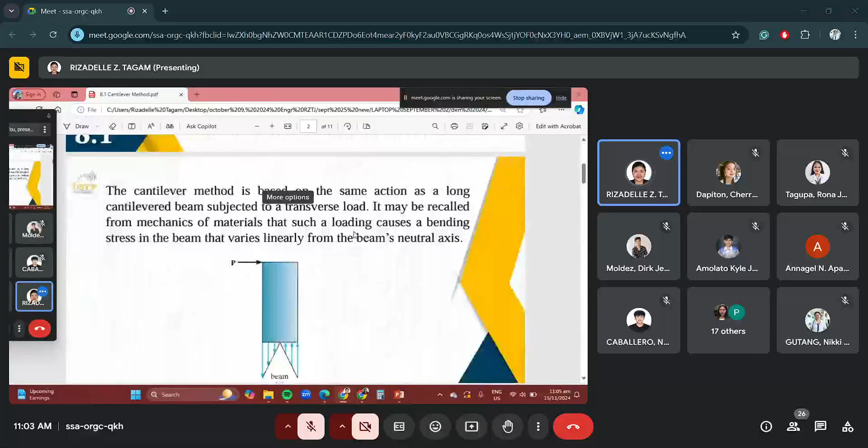So the cantilever method is based on the same action as a long cantilevered beam subjected to transverse load. So its behavior is the same as a cantilevered beam.

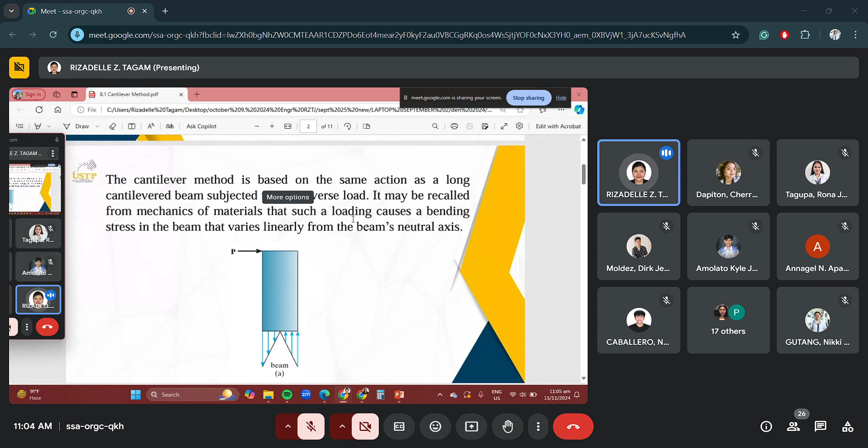Let's insert this concept, using the concept of the cantilever beam into our building frame. It may be recalled from mechanics of materials that such a loading causes a bending stress in the beam that varies linearly from the beam's neutral axis.

And if your force is applied here, there will be bending stress which happens. Usually that causes deflection. But on the profile of your beam, the curvature continues, it's curved throughout the beam.

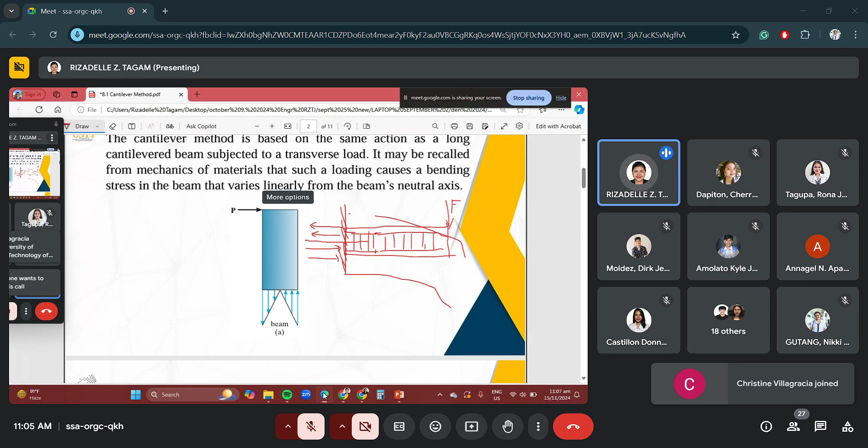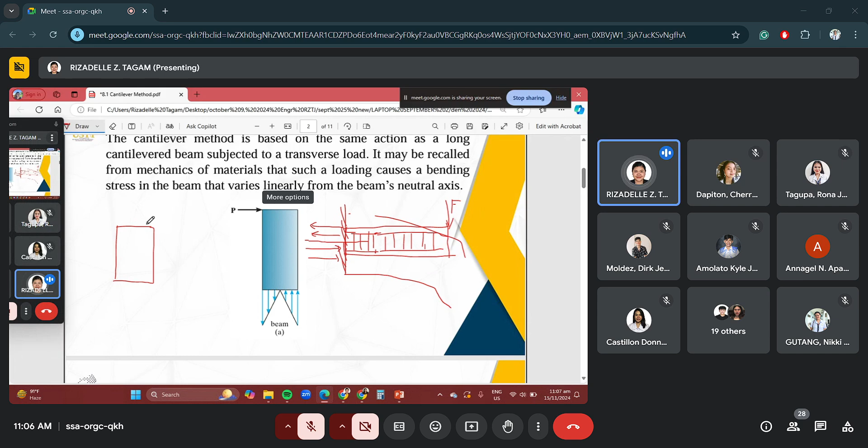The reactions counteract that. Okay, if you go on theory, in reinforced concrete, if tension is on top, compression is on the bottom, this is similar to the behavior we apply for our cantilever beam.

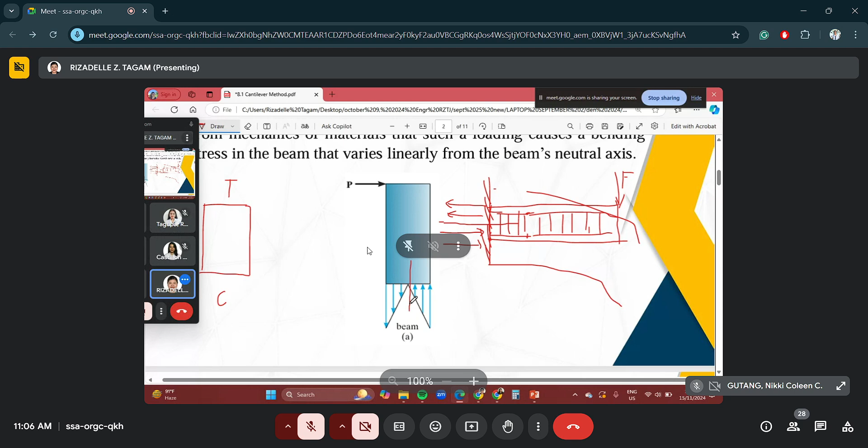At the neutral axis, on the left is tension, on the right is compression. So that concept will also be applied on our frame structure. This is called the cantilever method.

So in a similar manner, the lateral loads on a frame tend to tip the frame over. These lateral loads can cause the structure to rotate or tip, or it can cause rotation of the frame about the neutral axis.

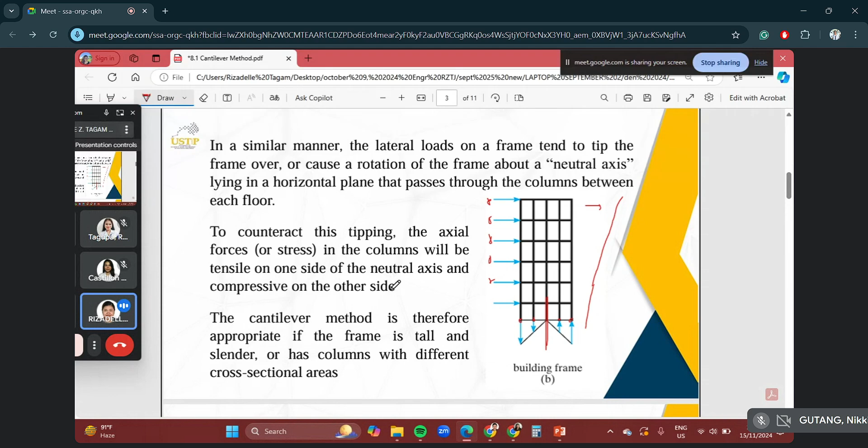So usually it's like that, and this rotation, this movement usually passes through the columns because your columns are the ones that resist it. To counteract the tipping, the axial forces in the column will be tensile on one side of the neutral axis and compressive on the other side.

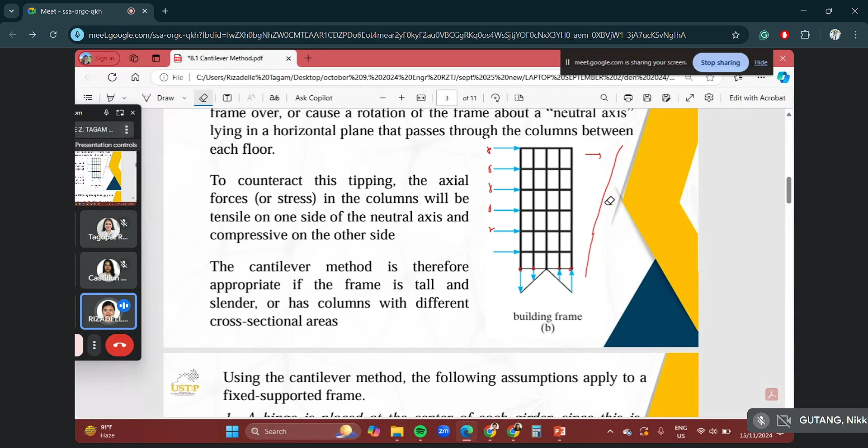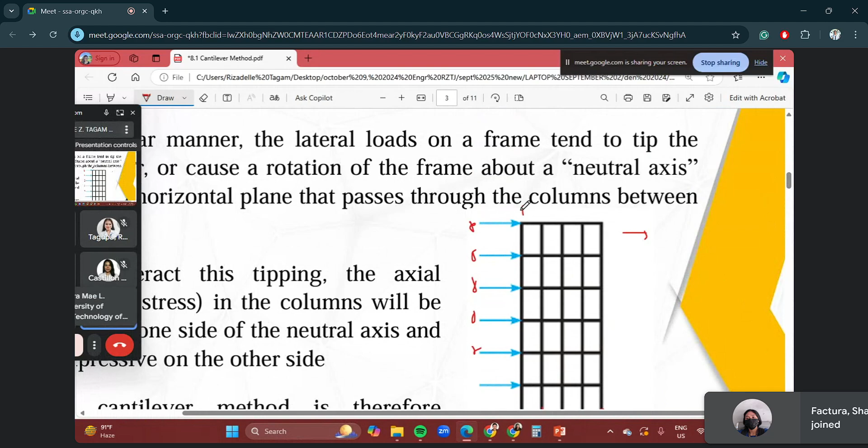This is where we also apply the concept for the cantilever. In the frame, you identify where the neutral axis is. Class, the neutral axis is not the center of the girder, don't just divide it as L. The neutral axis is L over 2, but it's not always like that, you need to solve for the neutral axis.

And once you've solved for the neutral axis, on one side, which is the left, that will be tension. On the right side, that will be compression.

The cantilever method is therefore appropriate if the frame is tall and slender, and the columns have different cross-sectional areas. In the portal method, we don't consider the cross-sectional areas, we assume they are the same. But if they are not the same, we apply the cantilever method instead.

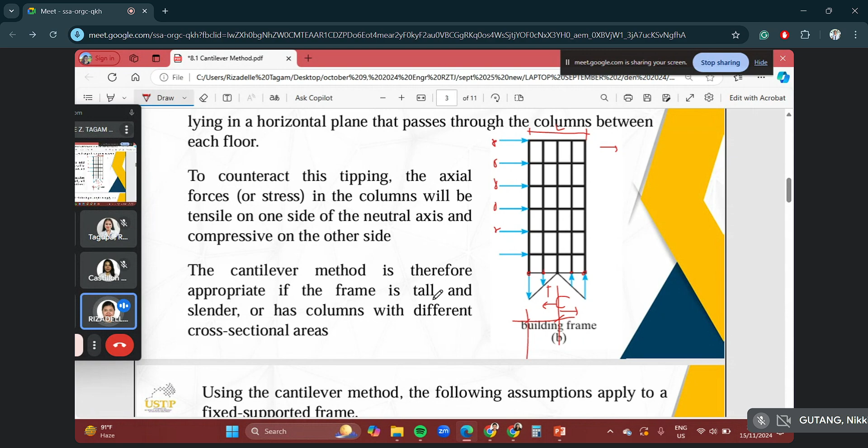So in the cantilever method class, we also have three assumptions to be applied, but these assumptions will be applied on a fixed supported frame. Fixed supported, okay.

In the portal method, we have three assumptions. In the cantilever method, we also have three assumptions. The first two are the same for portal and cantilever. The first is to place a hinge at the center of the girder, and that point has zero moment. The second assumption is to place a hinge at the center of the column, and that point is assumed to have zero moment.

But our third assumption is different. It's about the axial stress in a column. Now take note class, in the portal method, the third assumption is about the shear stress in a column. Shear is horizontal, right? In cantilever, the assumption is axial stress, meaning vertical. We only assume a vertical value. Okay, so that's the difference.

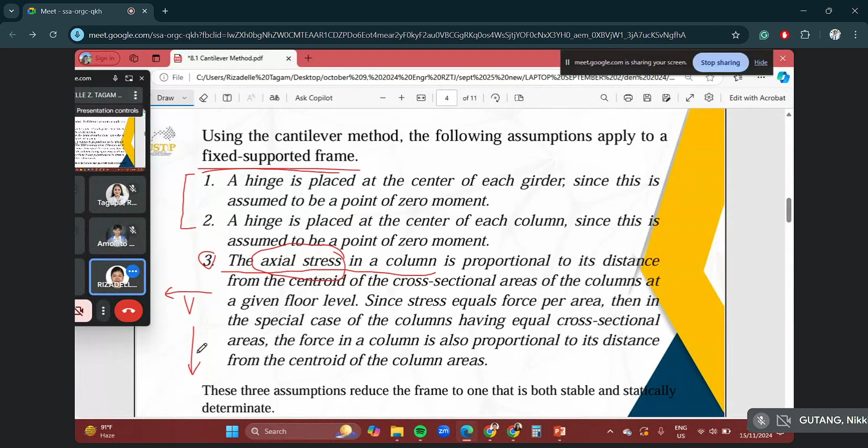So the axial stress in a column is proportional to its distance from the centroid of the cross-sectional area. So the cross-sectional area matters for our cantilever method, and you should know the distance from the centroid, that is, the cross-sectional areas of the column at each given floor level. So the analysis is by floor level.

So, since stress equals force over area, then in the special case if the columns have an equal cross-sectional area, the force in a column is also proportional to its distance from the centroid of the column.

If in this assumption the cross-sectional areas are the same, we can use force as proportional to the distance. But if they have different cross-sectional areas, you need to use the value of the cross-sectional area to find the centroid and solve for the axial stress.

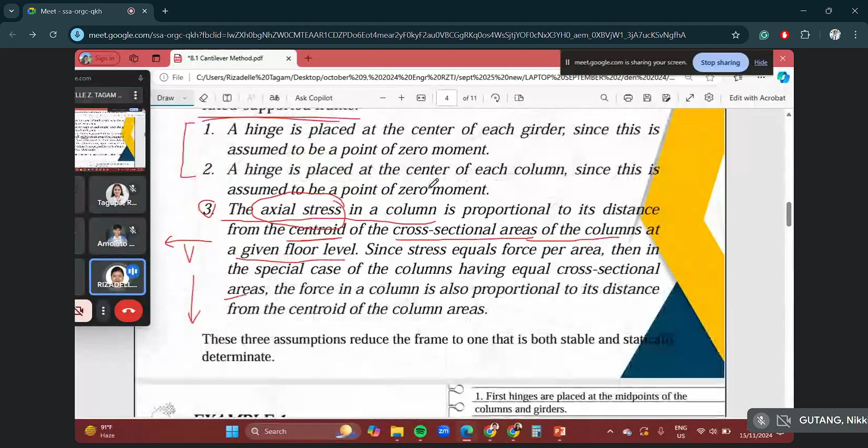So these three assumptions reduce the frame to one that is both stable and statically determinate. So that's the three assumptions, the first and second are the same as before. Now let's look at number 3.

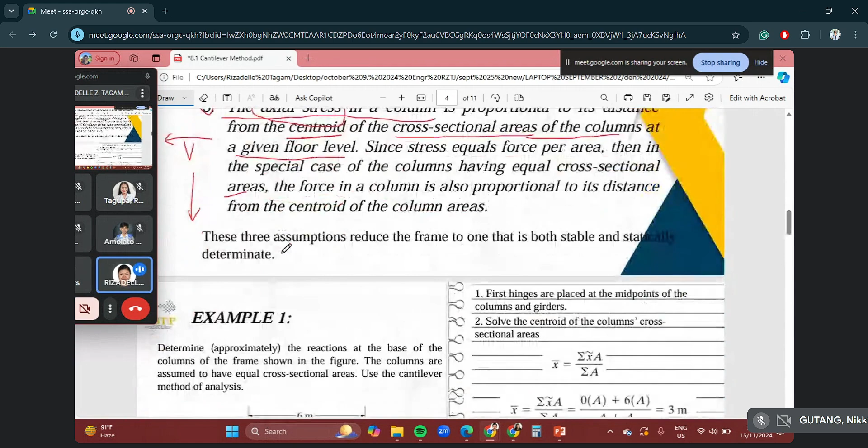So let's go to the example, class, still about frames. Determine approximately the reactions at the base of the column of the frame shown in the figure. So we need to get the reactions. For a while, let's start first.

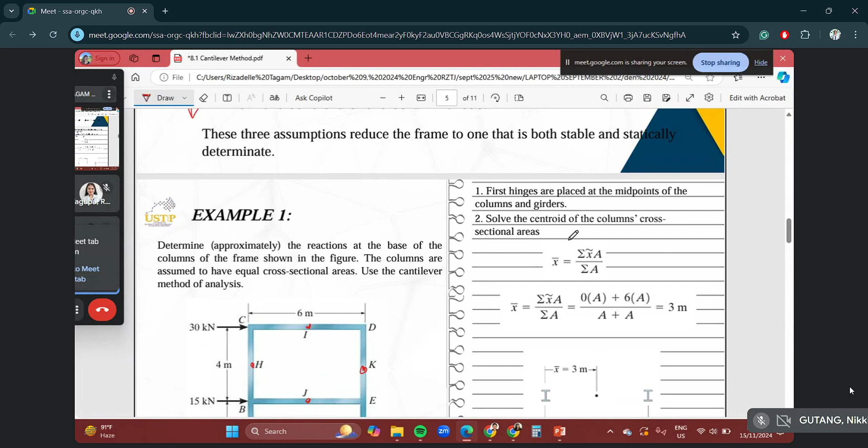First assumption: place hinges at each girder and beam. Second assumption: place hinges at the columns. So hinges are placed at midpoints of the columns and girders. The second assumption is to solve for the centroid of the column's cross-sectional area.

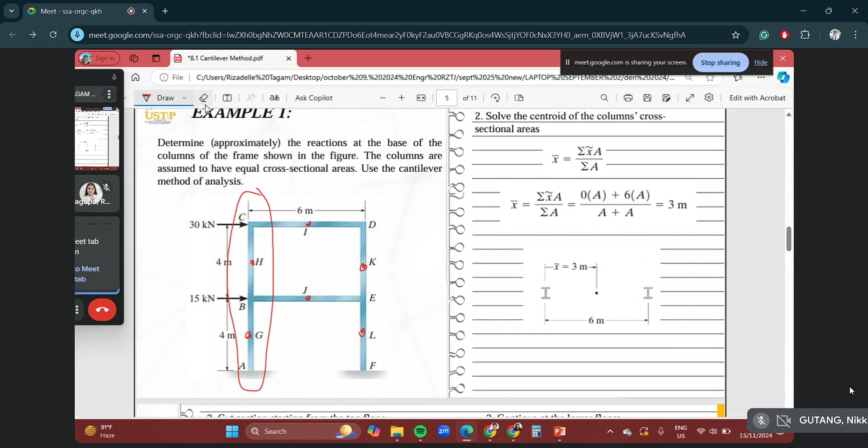For solving the cross-sectional area, since this is a typical frame, for each column going down to the ground, we assume the same cross-sectional area. But if ever they are separate and not the same cross-sectional area, from top to bottom it should still be the same, not different from top to bottom.

So as a whole, our analysis is for the centroid. The equation is this: X bar is equal to the summation of x multiplied by a, over the summation of a. This x is the distance from the left side multiplied by the cross-sectional area, over the summation of the cross-sectional area. If the cross-sectional area is the same, you will consider it as 1.

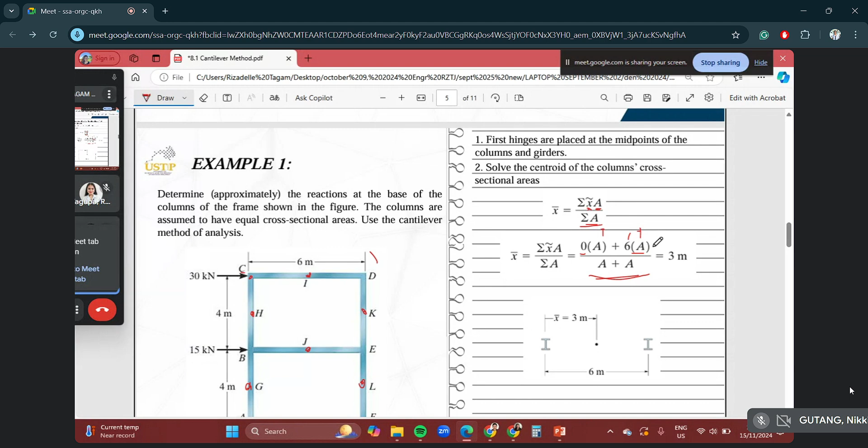The value is 1. So here, first is column C, this location, so 0, because we don't start at a point to the left. Cross-sectional area is A, plus 1. From C to D is 6 meters, so 6 times A, since they have the same cross-sectional area, over A plus A, area plus area. So the X bar we get is 3 meters.

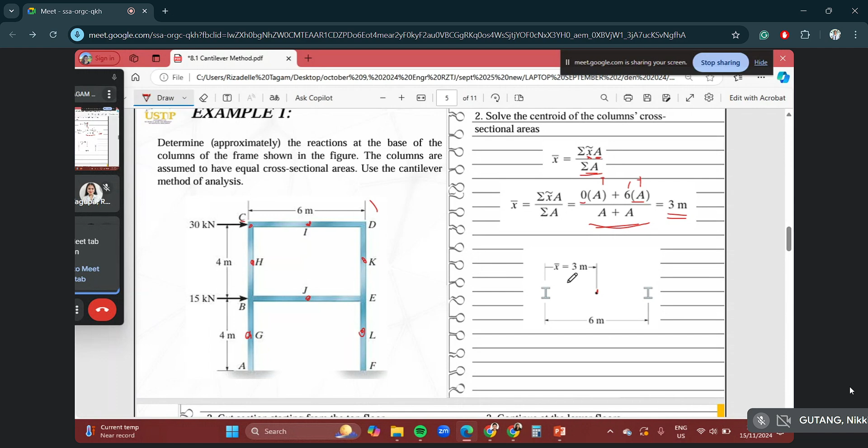Meaning your centroid is 3 meters. If you notice, if the cross-sectional areas are the same, usually the centroid comes out at the center of the girders, or at the center of your total length. But if not, with different cross-sectional areas, your centroid is not located at half the length. You have to solve for it. So now you have your X bar, which is 3 meters.

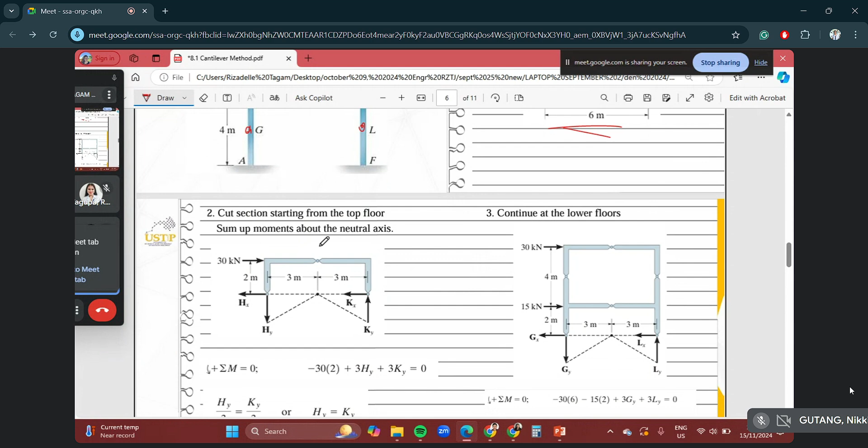The next step is you cut sections starting from the top floor and sum up moments about the neutral axis. If we compare this to the portal method: in the portal method, after placing hinges on columns and beams, you place the shear directly - 2V at the interior, 1V at the exterior, right?

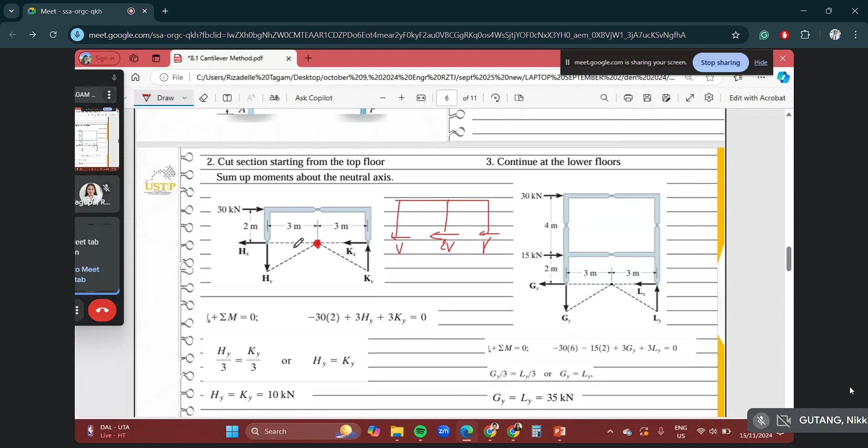When it comes to the cantilever method, you first get the neutral axis, or rather, get the centroid. After getting the neutral axis or centroid, to the left you place tension, to the right you place compression. They should be opposite - that's the concept in our cantilever method, opposite.

So if ever you have three columns in your frame, and you found out that the neutral axis is located somewhere here, so if to the X bar, this side is tension, these two are tension, this one is compression. Right? Okay, so the concept is: one side of the centroid is tension, the other side is compression. That's exactly how the cantilever method is set up, class.

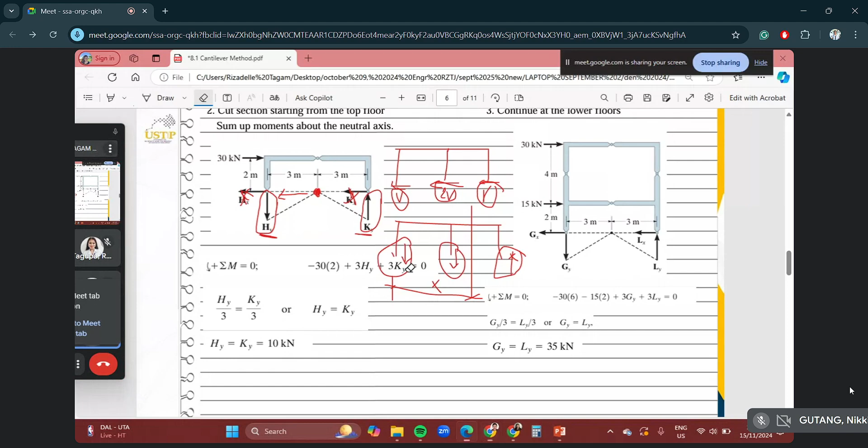In the portal method, you need to get the value of V first. In the cantilever method, you need to get the value for this one, the axial stresses. That's because these are unknown, right? They are unknown - what we solve for here is HY and KY, because that is what is stated in our assumption. That's the concept for the cantilever method.

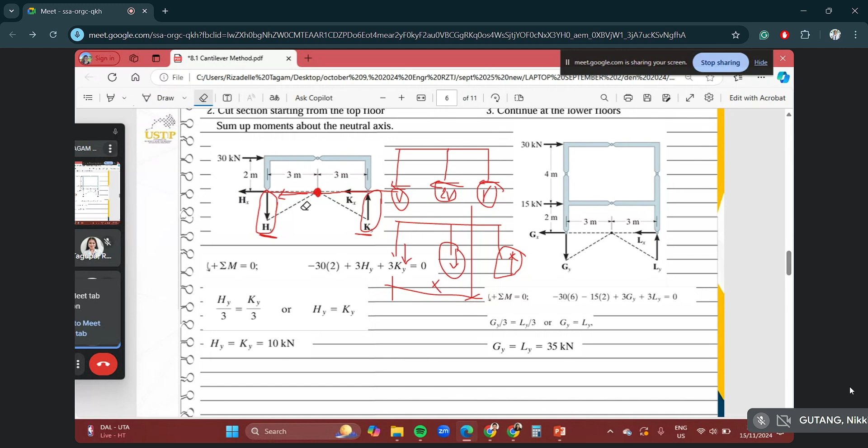To solve it, you will do summation of moment at the neutral axis, at your centroid, and at the part where, because of the hinge, HX and KX become zero. The unknowns are HY and KY.

And as you can see, these are proportional triangles, similar triangles. So you can apply the principle of similar triangles and conclude that HY equals KY. Now you can substitute: 3HY plus, you can make it HY since they are equal. You will get an answer of 10 kilonewton. So HY equals KY and the value is 10 kilonewton.

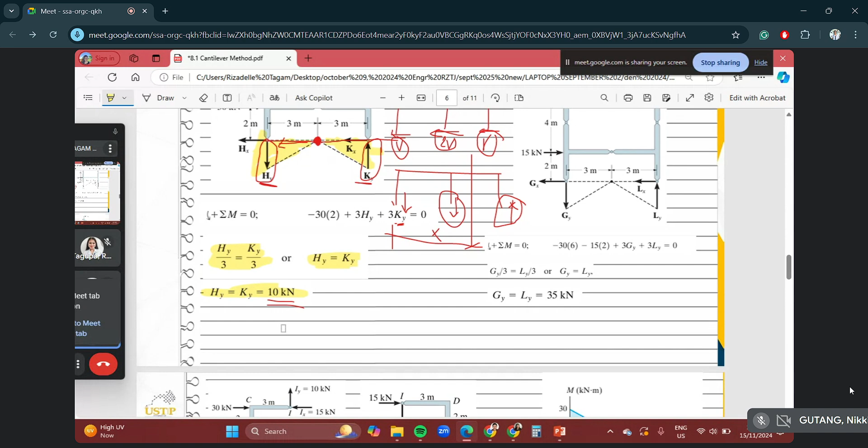So now you have the value of your axial stress on the top floor - not just the lateral force, class. Now you need to identify the values for the lower floor, since there are two floor levels. The process is the same: get the neutral axis, then tension on one side, compression on the other.

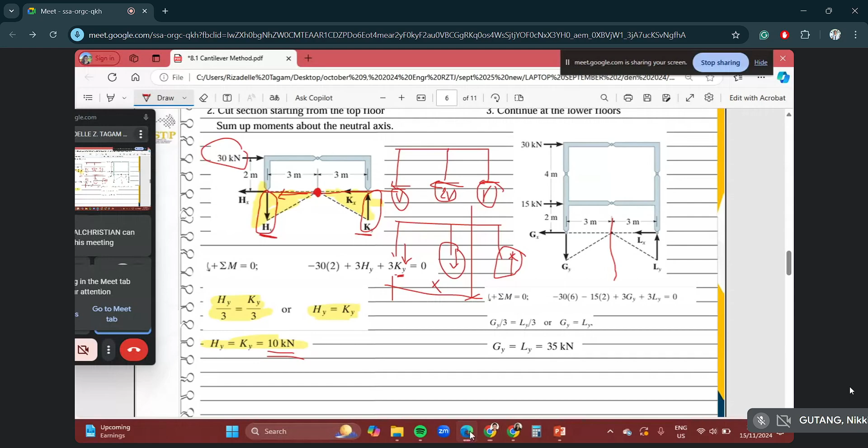Summation of moment. The forces now here, depending on your lower floor, you apil the 30 kilonewton that's on top. So the concept is the same as the portal method, kung mag-ubos ka na sa imong floor, apil na nimo ang lateral load sa taas. And then same gyapon, similar triangle sila. So GY and LY are the same.

So summation of moment, 30 and 15. Diri ka mag-summation sa center. Your GY and your LY is 35 kilonewton. Mao lang na values imong i-establish class, the value of your axial stresses.

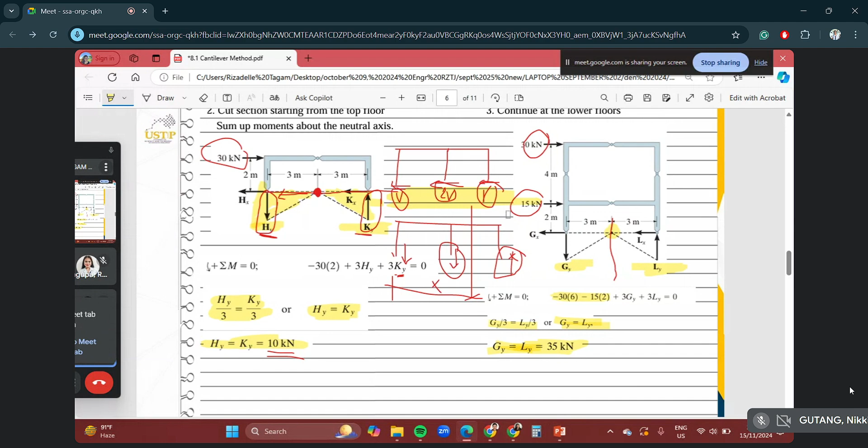Kay sa portal atong gina-establish is the value of our shear. Aya ta mo go into cutting sa atong hinges and mag-drawing tag FBD and then maglabay-labay ta og force. Sa cantilever, axial stress atong pangitaon. After makuha nimo ang axial stress into the frame on each floor level, aya na dayon ka mo go on into finding forces at each cutting.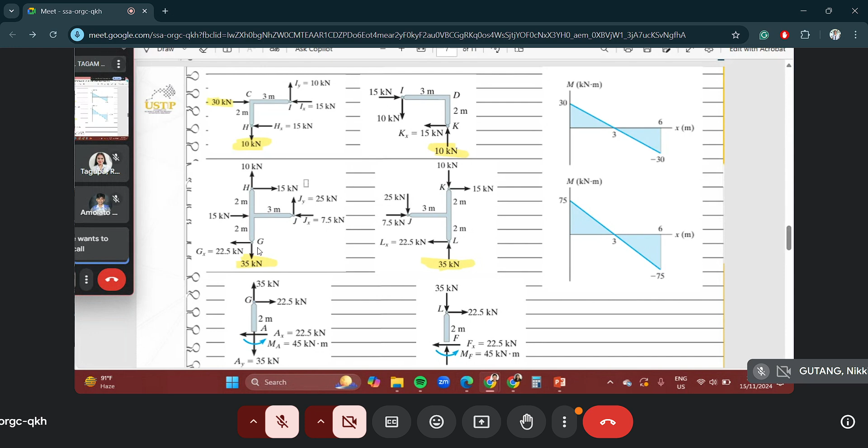So ang known ana is kaning 30 and then kaning axial. Kaya pag abot sa portal, ang known man is the lateral and the shear, kaning horizontal. Sa cantilever, si axial ang known, kani sila. And then you proceed on solving the forces using equations of equilibrium until you reach the bottom nga makakuha ka og reaction. So mao lang na ang cantilever method class.

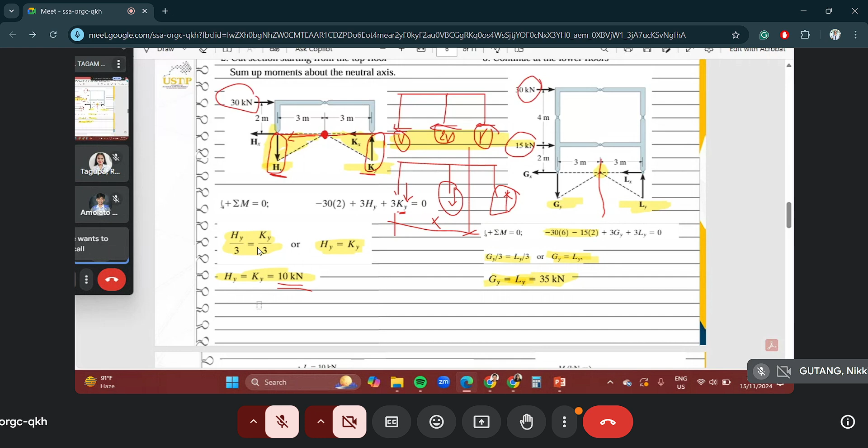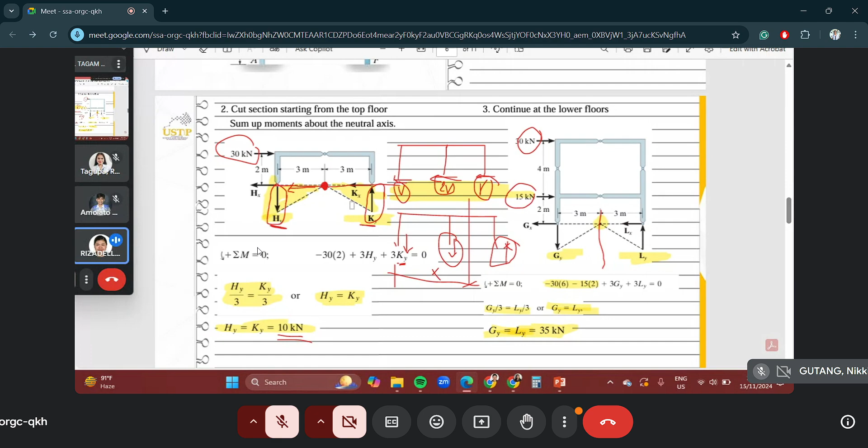Diri lang ka, diri ra ang changes, diri ra ang kalainan on finding the axial. So remember, para dili mawala, si portal, imong kuhaon is the shear, which is your horizontal force at each column. Column na gyapon. Ang cantilever is axial stress, which is the vertical force at each column also. Dayon, kuha nimo ang mga axial stresses, proceed na dayon into solving forces or hinges.

So muna din yung moment diagram, perfect. So any question? Naa tay tulo ka assumption, dali na siya ma-apply. Anyways, kaning concept, kaning topic sa cantilever and portal method is ginabalik-balik na sa inyo og discuss. Na-discuss mo gyapon ni siya, perhaps on mechanics of deformable bodies, or murag apil sa statics, wala, murag di sa mechanics deformable siguro.

Excuse me ma'am, pwede ra mag-alternative nga solution ma'am? What do you mean alternative? Kuhaon ang moment of inertia ma'am. Ang imong gamiton, kanang pwede mo yapon siya ng method for cantilever, M over I.

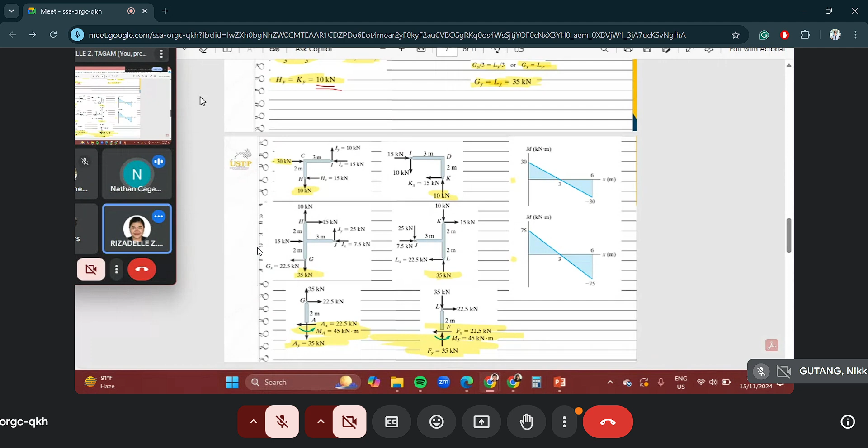Yes ma'am, pwede ra ma'am. Tanaw na to ha, tanaw na to. But they can, makahatag mangyapon na siya og same answer. Pero you can use it kung given ang moment of inertia.

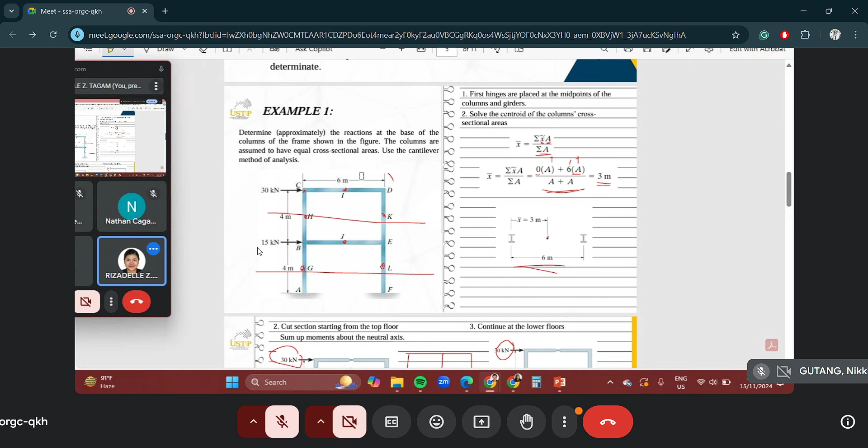Usually, diri ang given man is the cross-sectional area. Tawaning number 2.

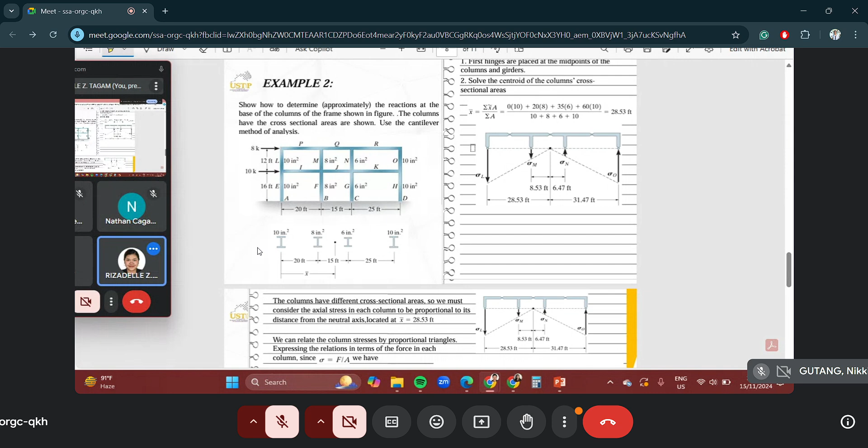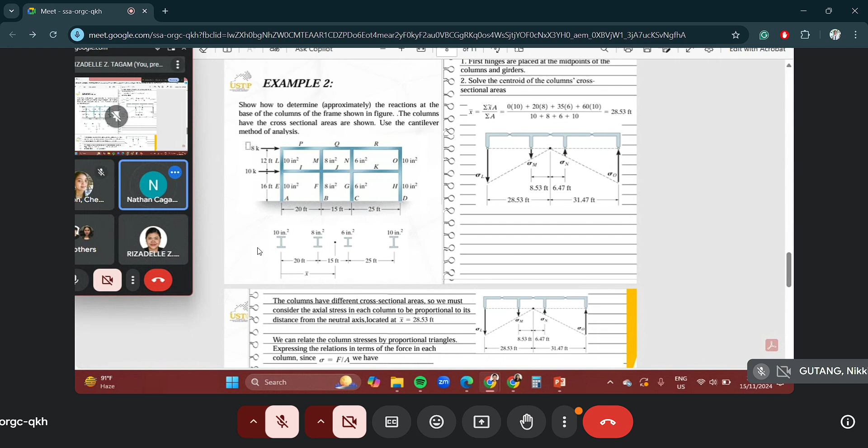Pwede ra man gihapon kay magamit mangyapon ka og centroid, 'di ba, for your moment of inertia. Yes ma'am, so unsay convenient? Oo, kung unsay convenient. Basta correct ang answer. Pero diri, whichever you find easier.

Okay, so kani example 2, tanawon. Kumanan ko lang ni. This example 2 is pangitaon gyapon ang reaction at the bottom of the frame, the columns sa frame, and they have different cross-sectional areas. Use cantilever method. So lahi sectional area, lahi po dere, lahi po here, and lahi dere. If you solve for the centroid of the cross-sectional area, different gid imong makuha na answer ana. Dili siya at the center of the structure.

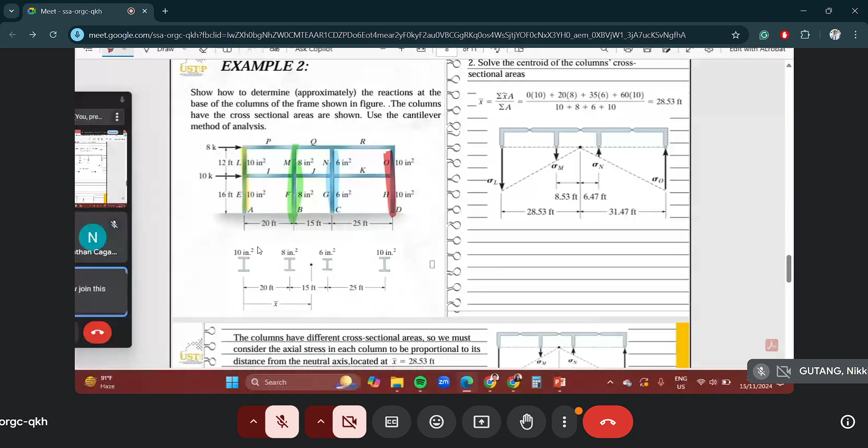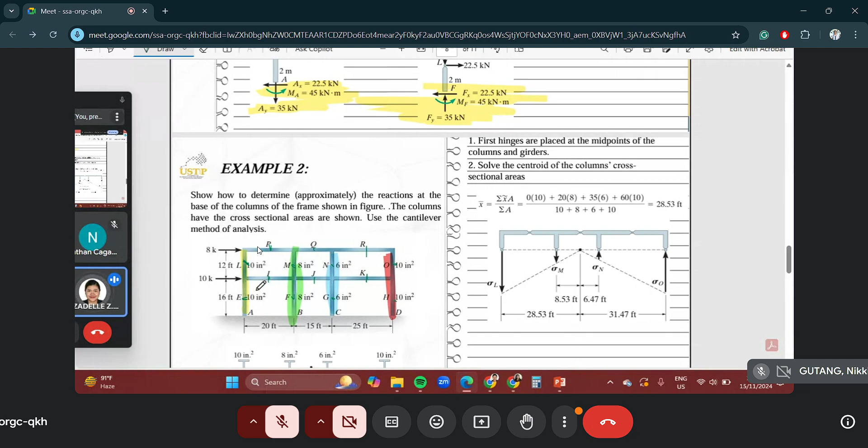So muning distance, first is you place hinges. Magyapon to place kag mga hinge at the center of the beams and columns. Center gyapon siya. So pag mukati na kasi imong hinges, kabalo ka sa distance, kay half from gyapon na siya. Then solve ka for the centroid of the column's cross-sectional areas. So this is our equation.

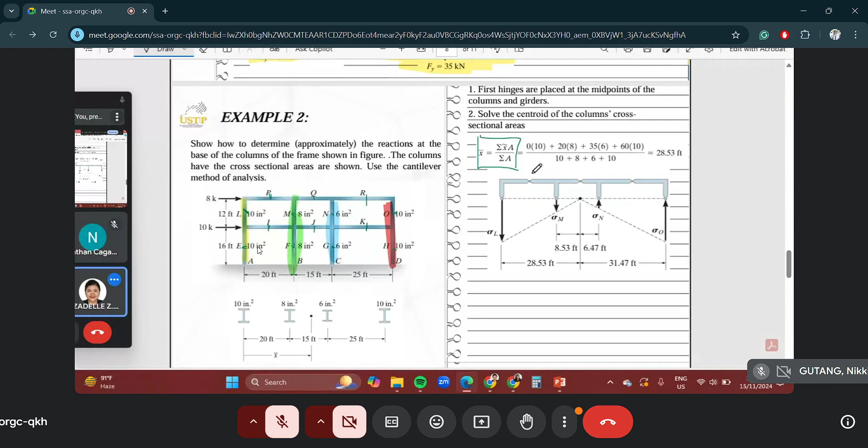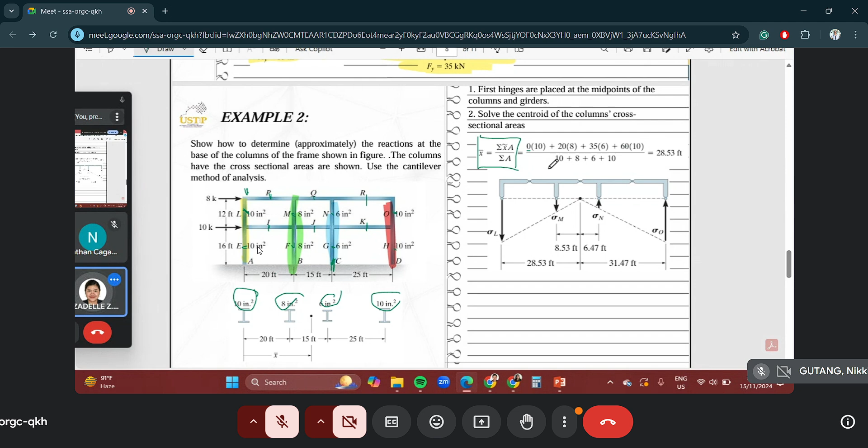So from the left, dito gikan. So 0 plus 10 nga cross-sectional plus 20 nga distance, 8 na cross-sectional area, plus distance na 35, kay diri nga column is 20 plus 15, multiplied by 6 na cross-sectional area, and then sa last is 20 plus 15 plus 25, so 60, multiplied by 10 yung cross-sectional area, over the summation of cross-sectional area. Your centroid is 28.53 feet.

So i-drawing na din mo asang centroid. On the left side, butang nimo tension ang mga axial stresses. On the right side, compression ang mga axial stresses. And then you put the distance, then you can identify the distance from the column M, neutral axis, i-minus naman nimo kay 20 feet man eh. Diba, you can eventually solve the distance.

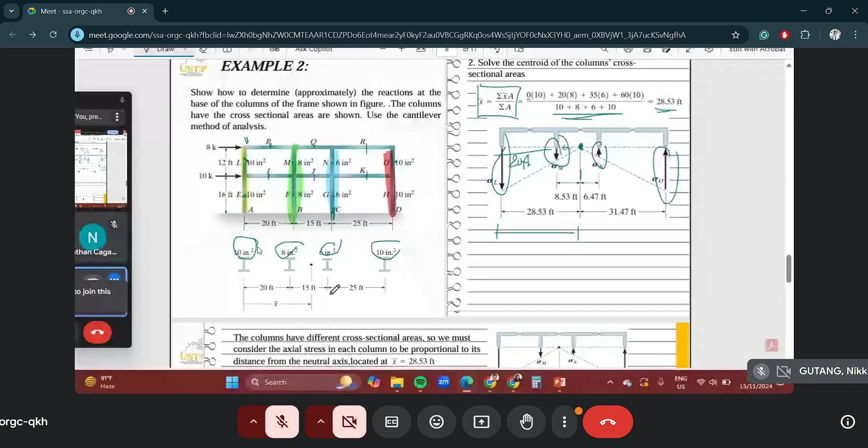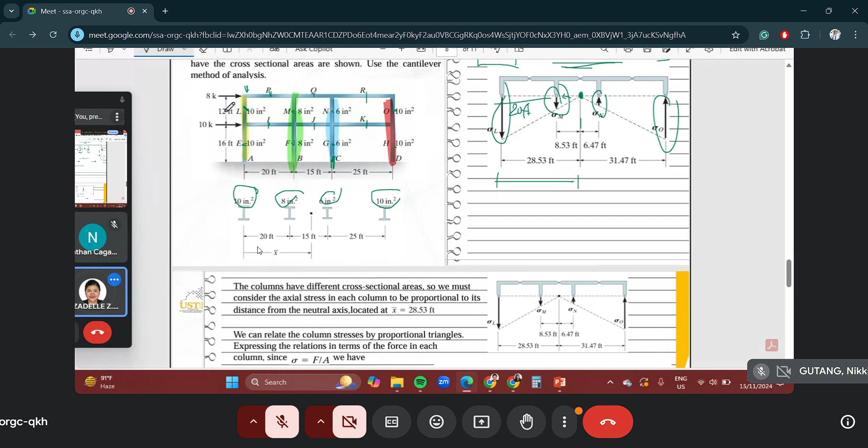Okay, so after niyo ma-solve ang centroid, kailangan nimo ma-solve ang forces: si Ly, si My, si Ny, si Oy. Dili pa lang na sa top, mo-solve po din ka sa second layer. So they are having different cross-sectional areas.

So we must consider the axial stress in each column to be proportional to its distance from the neutral axis located at 28.53. Now, ang atong pag-solve ani, because they have different cross-sectional areas, atong gamiton is ang stress. The axial stress of the column is proportional to the neutral axis.

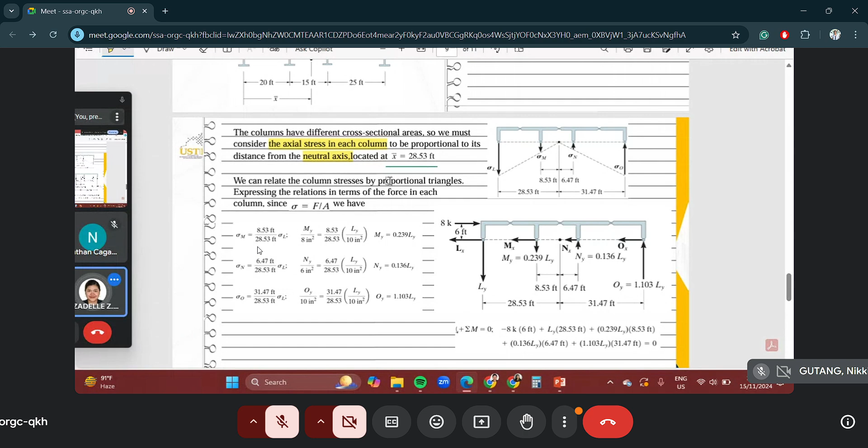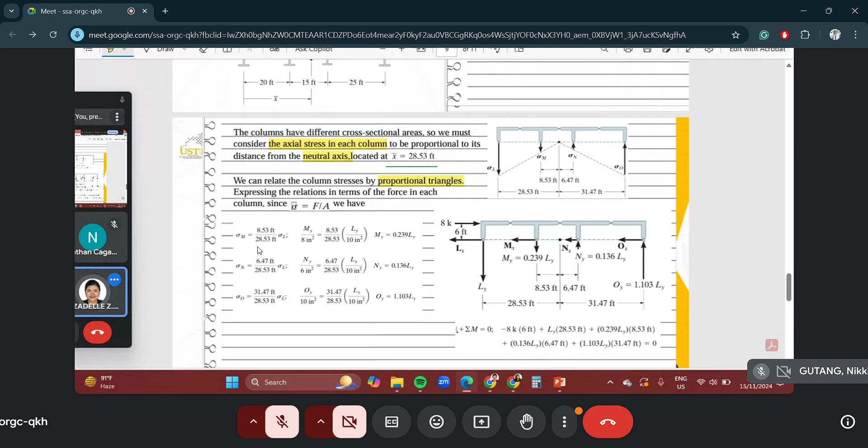We can relate the column stresses, since if you look at them, they are proportional triangles. So we can put relationship into the forces of the column since stress is force over area. This is a triangle, one triangle, one triangle, and one triangle - four proportional triangles. Because they are four unknowns, we cannot easily solve this.

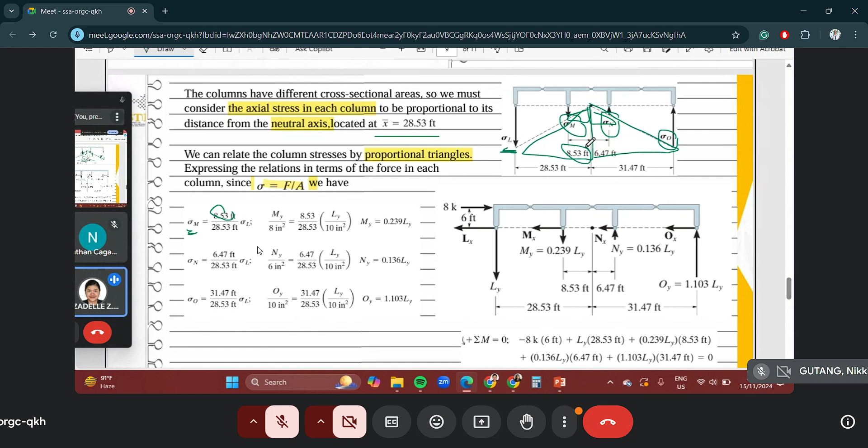So we will get the equation of my in terms of ly, ny in terms of ly, and oy in terms of ly. So it's proportional - the stress is proportional to the distance of each column to the neutral axis and to the stress of our L. So for this one, 8.53 over 28.53, which is the distance of L from the neutral axis, multiplied by the stress L.

So for your N, stress N is 6.47. This is proportional to L, since L is our basis. It should be obtained in terms of L - 28.53 multiplied by the stress L. For OY, for O, stress O is 31.47, its length multiplied by the stress L.

Now let's simplify - stress is force over area. So my over the cross-sectional area of 8. This is the distance, and for ly it's ly over cross-sectional area of 10. Where did the 10 come from? For ny, its cross-sectional area is 6.

You put the distance as proportion, and ly over 10 inches squared - force over area. The same goes for oy. And when you simplify the equation, my is 0.239 ly, ny is 0.136 ly, so oy is 1.10 ly.

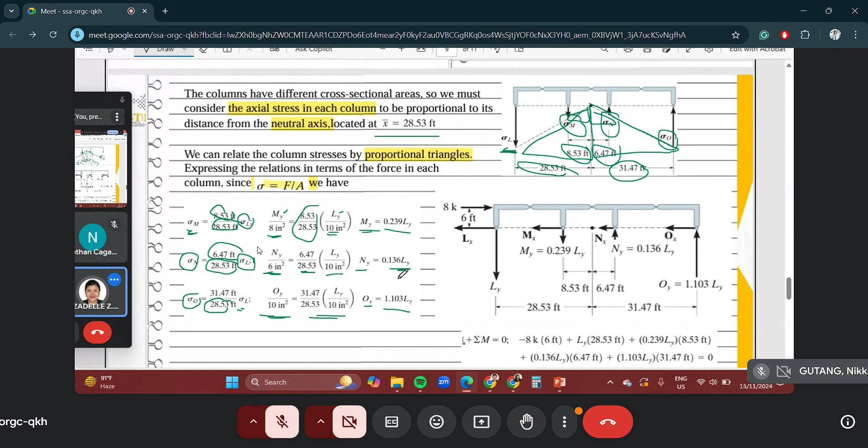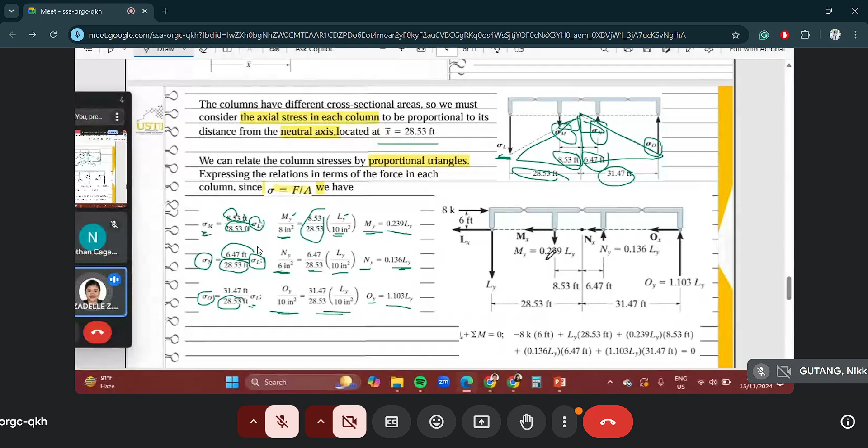So now you have the equation of the forces my and ny in terms of ly. That's why you substitute here into your actual stress equations, and you can now do summation of moment at the neutral axis at the distance of the centroid.

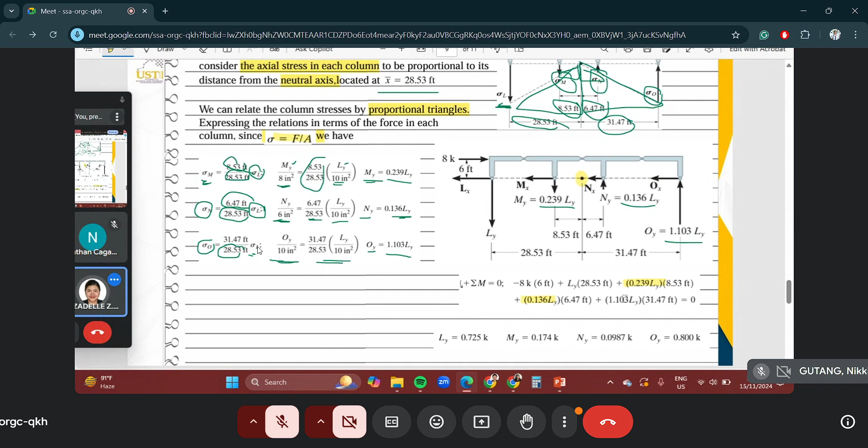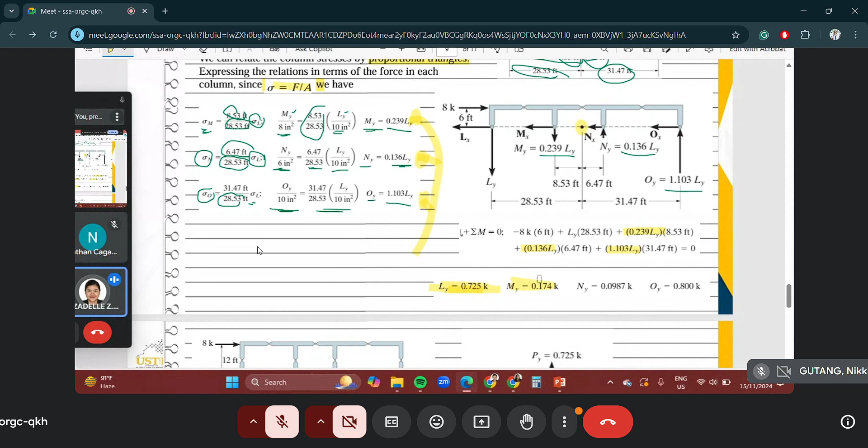So you get the moment in terms of ly, then multiply by the moment arm. Then you can now get the value of ly, 0.725 kips. Just substitute this into these equations and you can get the values of my, ny, and oy.

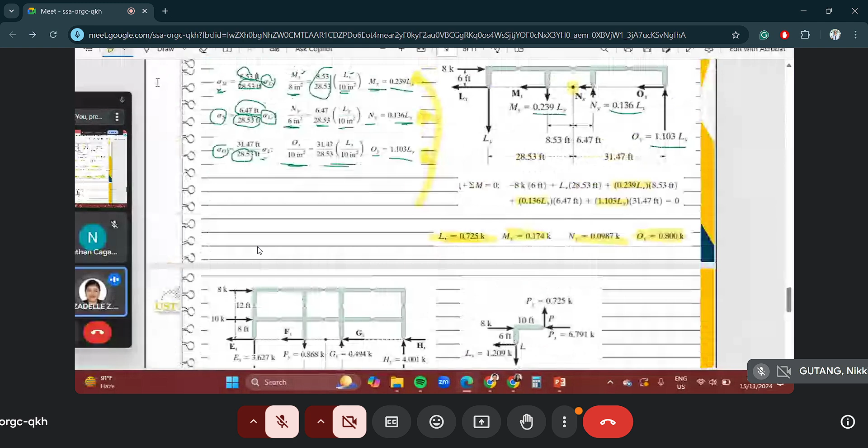Since the cross-sectional area is the same at the lower portion, you can use this same equation there. The equation can be applied at the lower portion too - it's the same, since you go directly through it.

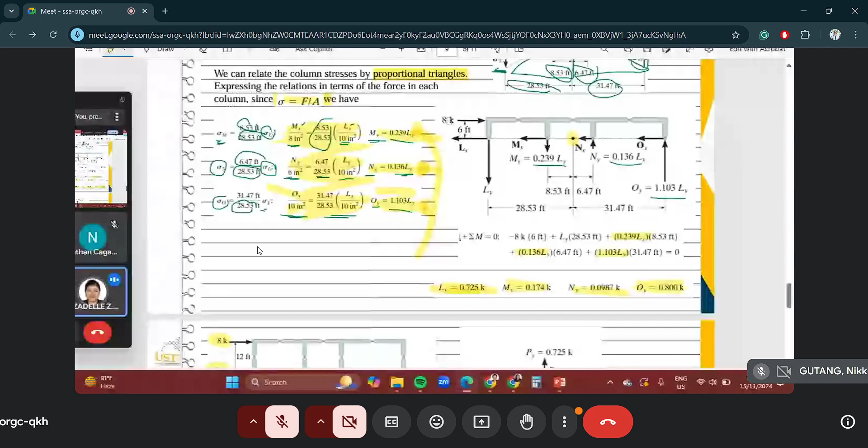Question: why isn't the answer the same? Because the lateral forces are not the same. At the top floor, you only considered 8 kips. When you get to the second part, you now have to combine 8 and 10. So your moment uses 8, but your lateral force is 18 total - so you get a different force from that.

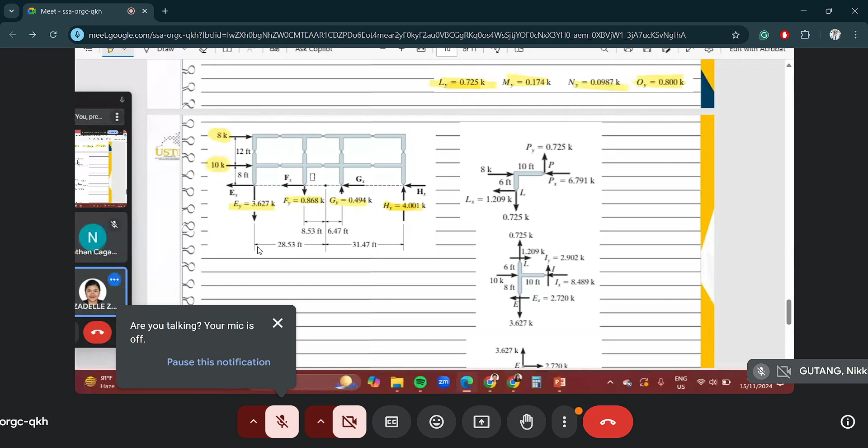So that's how you get the value for your axial stresses. Don't forget that the opposite side from your axis at the centroid is on a different side - different tension and compression. So once you have the distances, you now have the axial stresses.

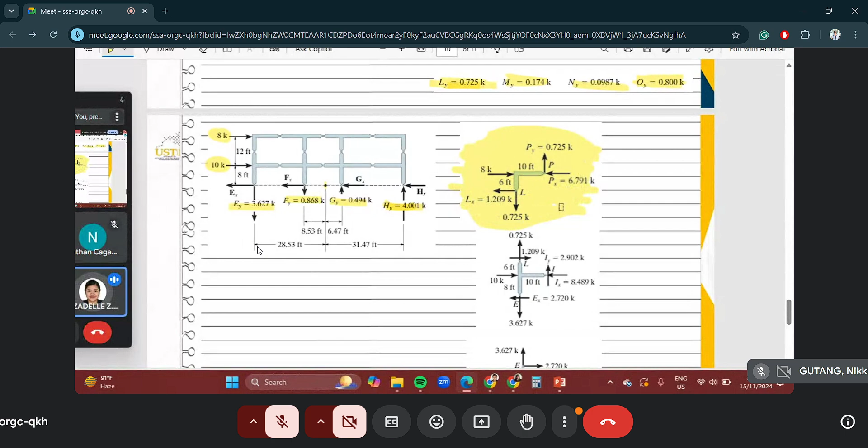You can now do cutting of the section. But remember, the analysis must always start at the corner where the lateral force is, at the top floor. Then you do summation of equilibrium, going through the forces until you reach the value of your reaction. This will also be shown.

After you get the forces, the given values are 8 kips and then 0.725 kips, then you can proceed on solving. So thank you so much - that's the concept on our cantilever method.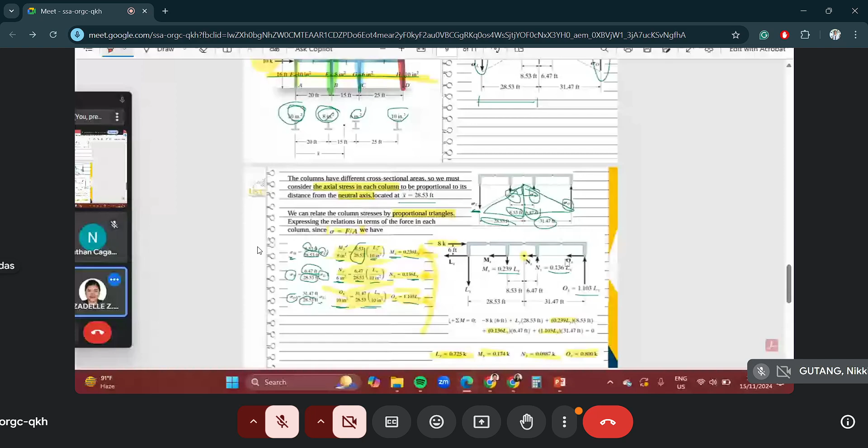On my assessment, the cantilever method is easy if you have the same cross-sectional area. But if the cross-sectional areas are different, the Portal method cannot be applied. So, any question for the 11:30 class?